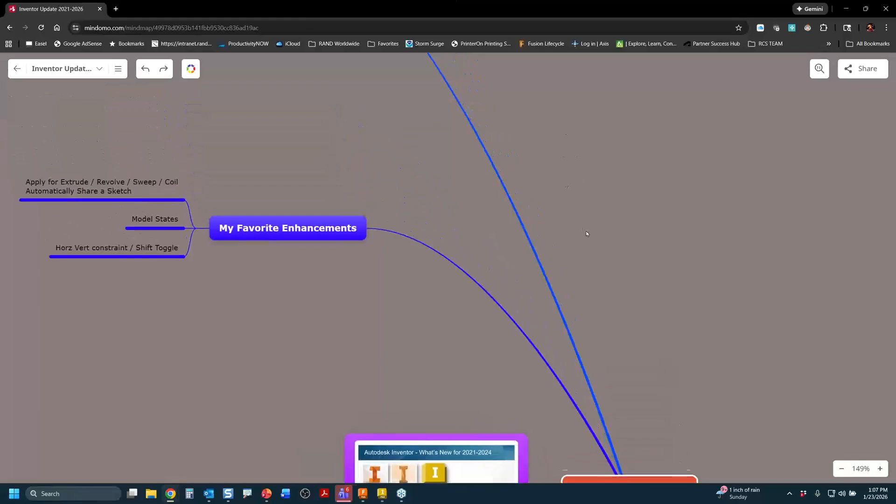I'm going to drag over this mind map, so bear with me, but this is how I keep my notes these days, talking about investing in new technology. When I started to look at this project, it was just 2021 to 2024. But then another customer came in and said they needed to go to 2025.

So what you're seeing is my collection of new features that I needed to share with new clients. And I had a rule: I wasn't going to share every single feature. Believe it or not, that's just way too much—there's no way I can share all the stuff that comes out each release. But I wanted to focus on the day-to-day use. If it impacts your day-to-day use, I want to cover it. If it's a change to a very basic command that everyone uses, I want to cover it. If it's a major change to a basic command, you've got to cover that.

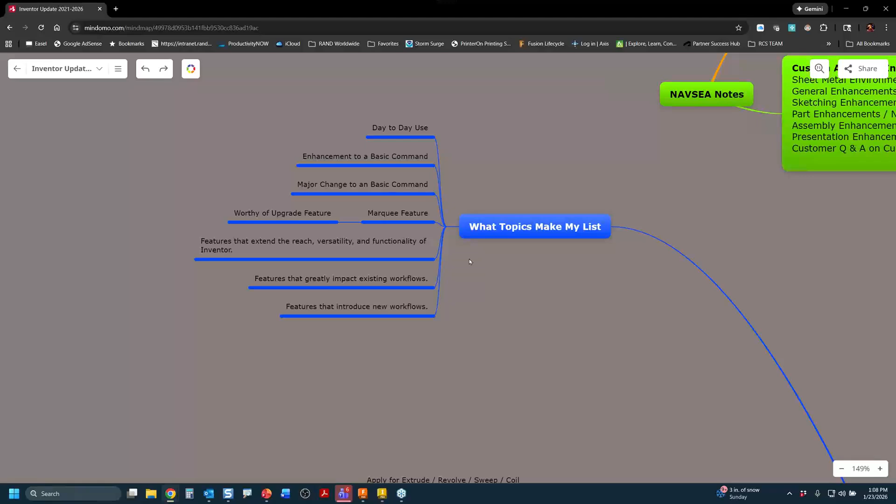But I call these, if it's worthy of upgrading, marquee features. I'm going to share with you what I think the marquee features are in just a minute. Each release has that marquee feature it's known for, but also features that extend the reach, versatility, and functionality of Inventor. I wanted to share those—features that greatly impact our existing workflows, which is really what we're here today to talk about, or features that introduce brand new workflows.

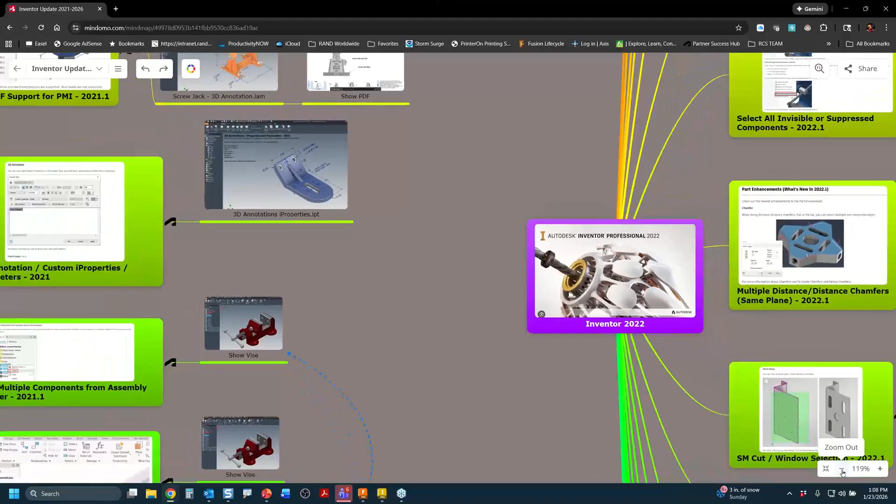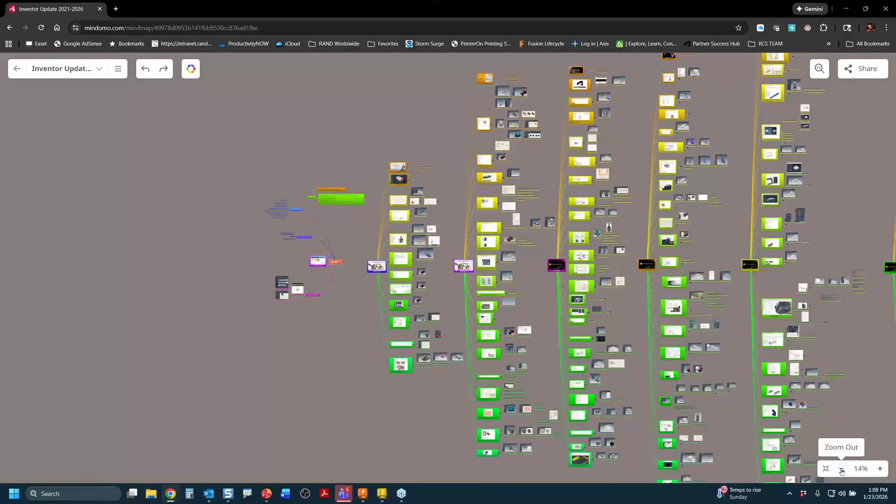So I mentioned I started with 2021 and went in and did that, and then I looked at 2022. I'll pan over here just a little bit more, and then I'm going to start backing out because it just got crazy. The more I looked, the more I saw really how much Autodesk is still investing in updating Inventor and making it viable for us to utilize. So I'm still working on 2026, and I know 2027 is coming out in a few months. So this is a very difficult thing.

But listen, your next update training class might not be to a specific version. If you're looking at update training, you might want to just look at, hey, show me what's new in the last few releases and let me get caught up with all of that.

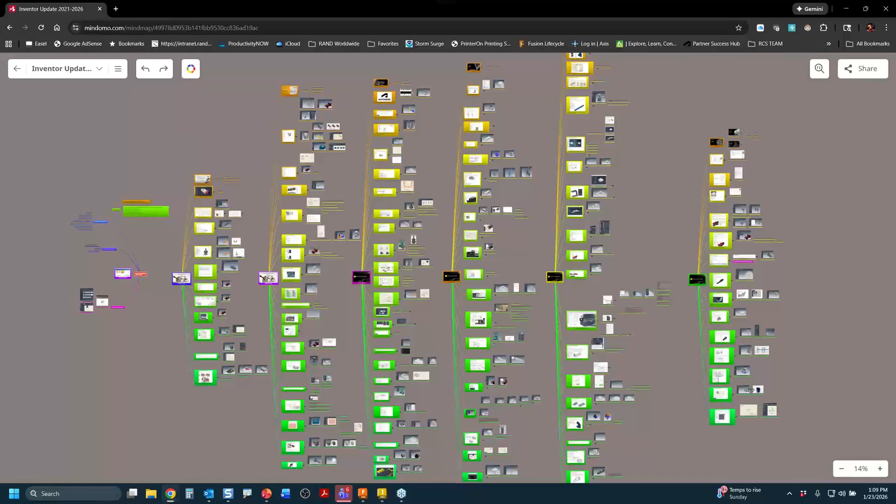All right, so I'm going to hop back in over here into PowerPoint, and I want to start talking about those marquee features—features that really do change the way we work. And we're going to start by looking at Inventor and how it does that.

So I think for the past several releases, the marquee features—most of you know them. Like in 2022, they introduced model states, and that really did change a lot. Model states are amazing. In 2022, there was also one of my most favorite features: the Apply command started to get introduced to a lot of the feature dialog boxes. I'll talk about that in a minute.

2023, that was the Mark tool and etching—etching became a feature that we could include in our parts. 2024 introduced Finish, so I could actually have a feature for powder coating my parts, painting them, or polishing them. That feature would actually show up in the hierarchy of the model.

2025 really did focus on sheet metal enhancements and redoing the sheet metal interface. 2023 to 2026—one of the major ones in 2025 and 2026 is the enhancements to the bill of material functionality. 2025 introduced a lot of pattern enhancements, and 2026, you'll see in a minute, brought zones and things like the open and save dialog box getting changed.

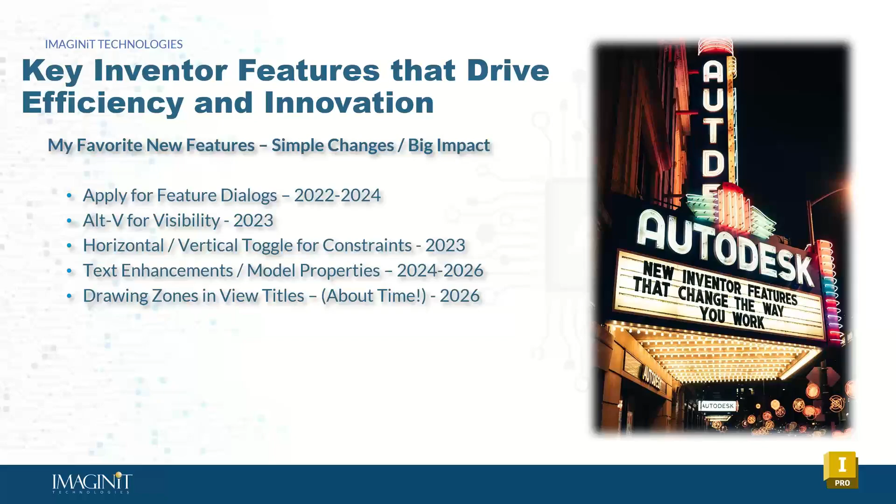So I want to share with you some of my more favorite ones. And if you didn't know these, again, maybe it's time to think about looking at some update training. So I'm going to hop over here to my Inventor application.

The first thing I'm going to show is a very simple one. It's a way to toggle the visibility off of certain objects. This is one of the exercises I developed for my update training class, so it's got some instructions here on the screen, don't worry about that.

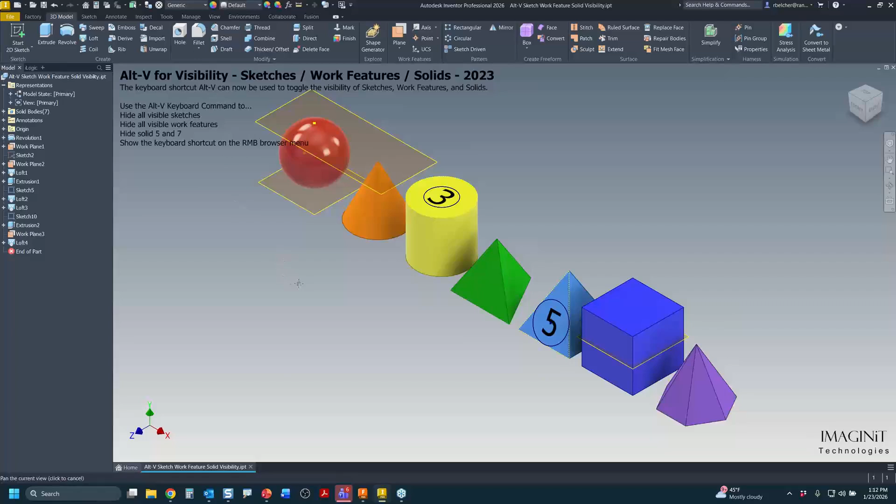Have you ever opened up a file and had sketches visible? Someone had left a sketch visible or a work feature visible? Or maybe you just wanted to turn the visibility off of a certain body. Normally you'd go over here to the browser, and I love this about Autodesk. Here's a sketch that's visible, and usually we used to right click on this and select visibility.

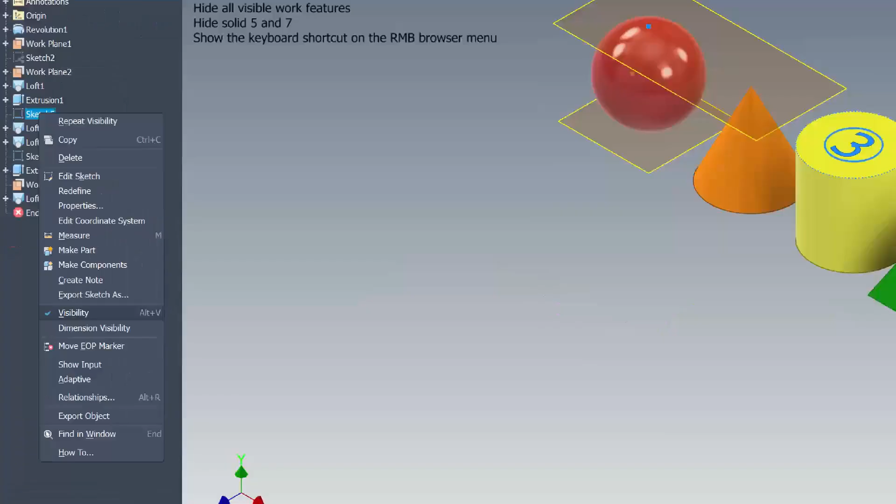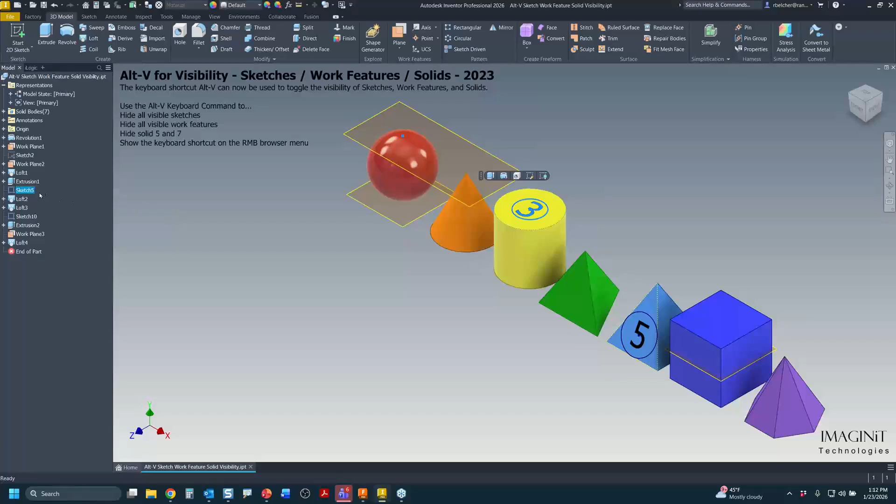If I zoom in here for a minute, for ages they've been telling us that the hotkey for visibility is Alt-V. But honestly, you had to be in this menu to actually use the Alt-V hotkey. I can't remember, but I think in 2023 they fixed that. So now I can simply select the sketch and click Alt-V, and it disappears.

I love that, that saves me 2 or 3 clicks right there. So there's sketch 5, I can get rid of that. It works for work planes too, so I can click those, do a little keyboard shortcut, get rid of those work planes. And it also works for selected bodies. If I go through and start selecting my bodies, I can quickly turn those off and on very easily with that little keyboard shortcut.

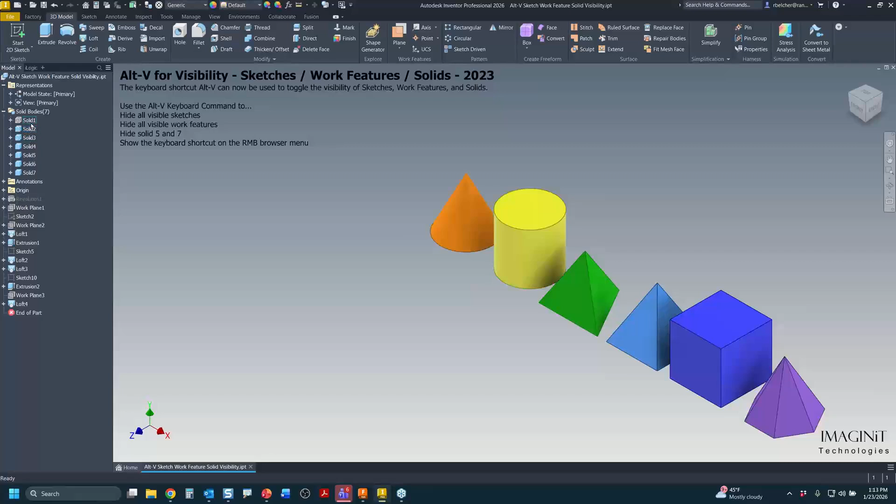So, Alt-V. Between you and me and friends here, it's not the most comfortable keyboard shortcut, but it's a good one to know. Think about me being an AutoCAD or Inventor old fart guy - I'm fighting muscle memory on that because I'm so used to right-clicking and doing it. But incorporating that little Alt-V trick could save me steps every time I think about the visibility of objects.

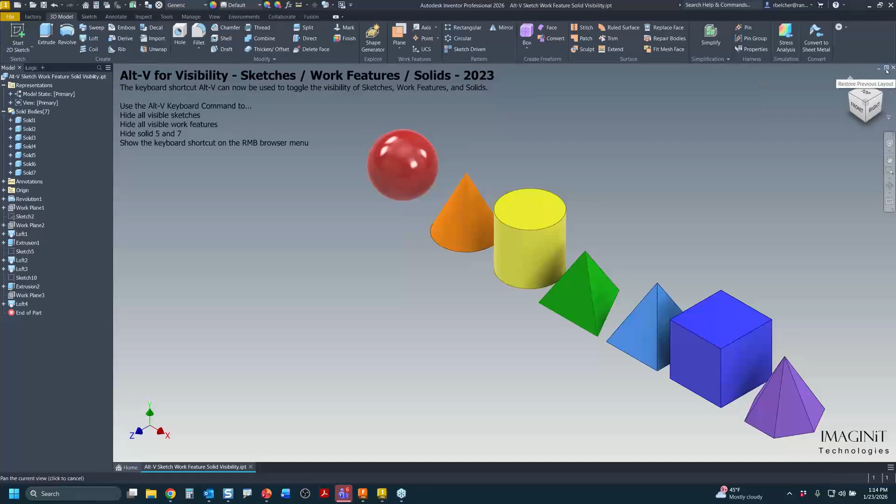All right, we're going to get out of this file. Let me get into another one here. I wanted to talk about another feature that I dearly love, and that's the fact that they've added 'apply to many' to many of the feature dialogues in Inventor, like extrude, revolve, sweep, and coil, and I think it's in loft as well. But here I want to focus on the fact that a simple change can drastically affect the way I work.

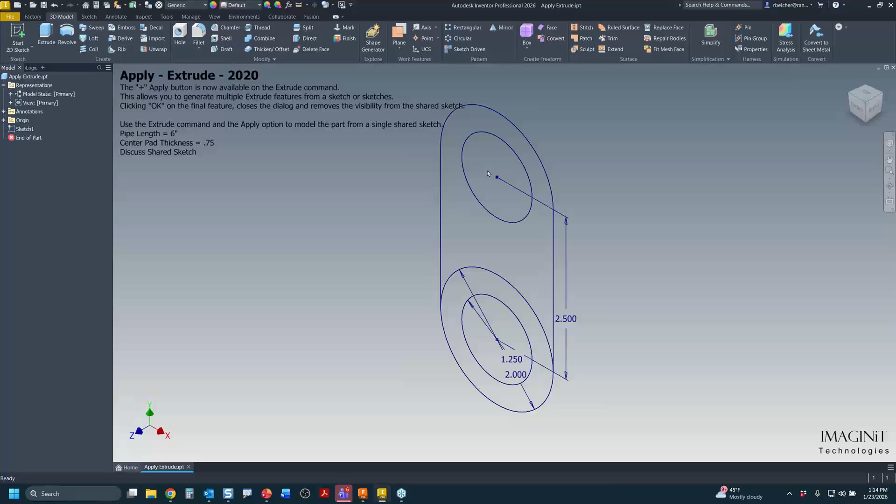So this is a simple little sketch here, and I want to do some extrusions real quick, and I want to show you the classic way first. If I start my extrude command, I would draw a sketch - I've got that already done - and I'd set up the extrusion. I want to extrude this to be 6 inches, so we'll drag down here to 6 inches.

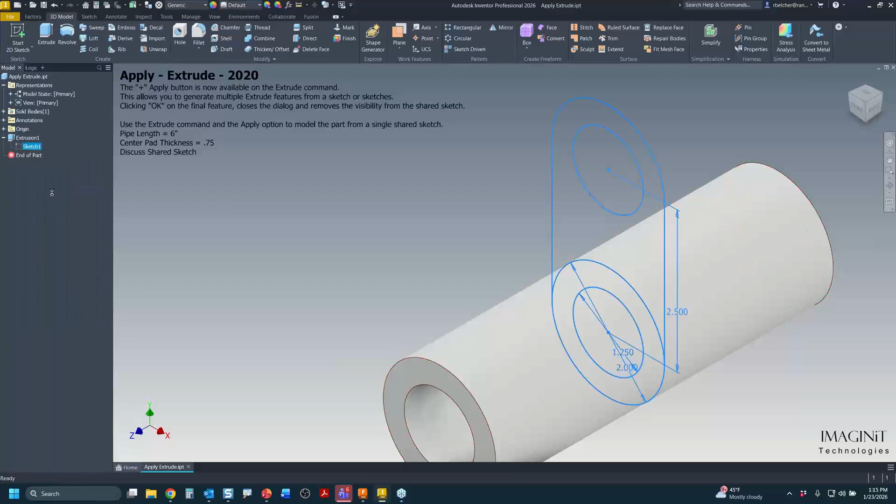And normally, if you would do a shared sketch methodology here - classically I'm used to this - I'd click OK, then go to the browser, find the sketch, right-click and share the sketch. Then you'd have to start the extrude command again and go through and create that feature, click OK, then go over to the browser and turn the visibility off of the shared sketch. Many of us have been working that way for 26 years at this point, so there's a bit of muscle memory and reflex here.

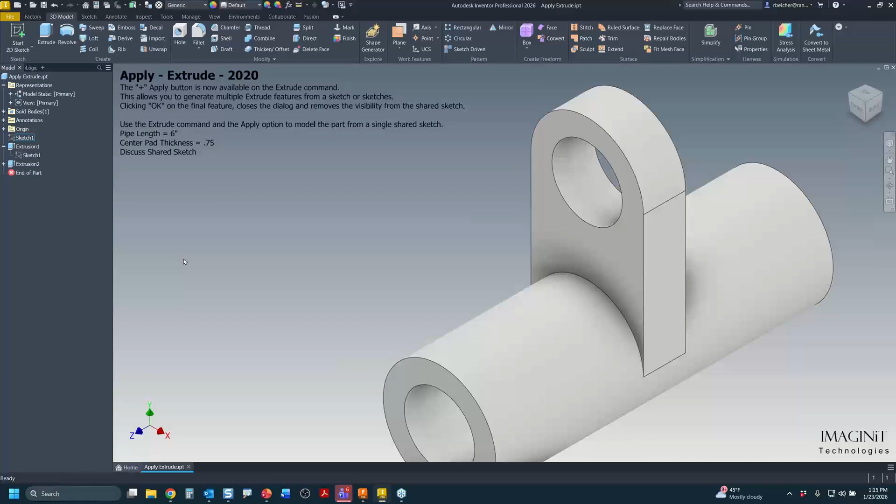But now let me undo real quick, let me get back to where I was when I started here. Let's do it the modern way - and I love this, it's such a simple change. You click extrude, we select our first profile, and we'll drag it out to the 6 inches.

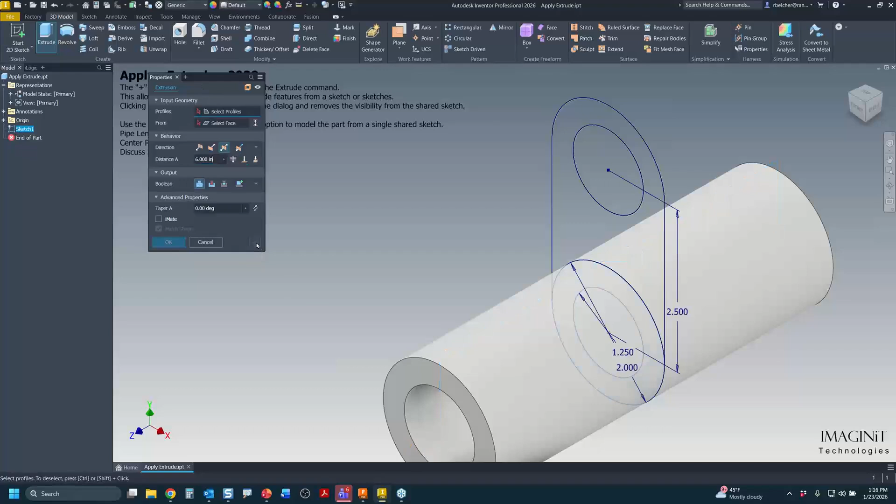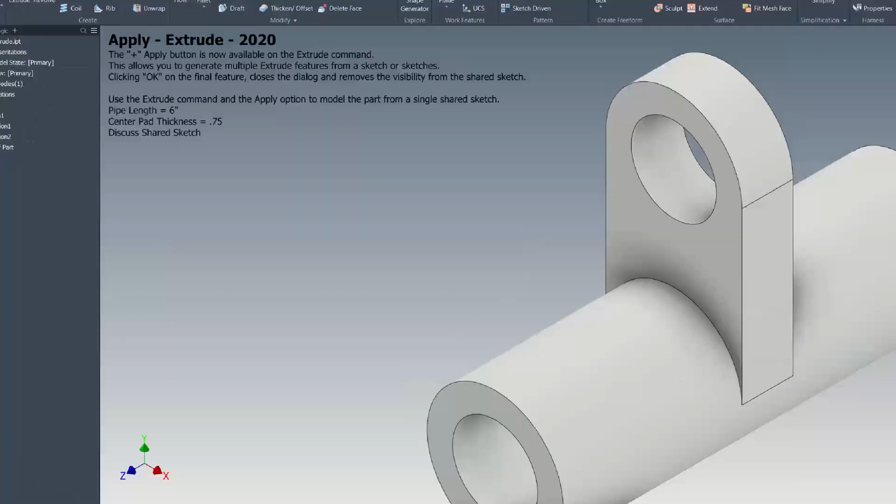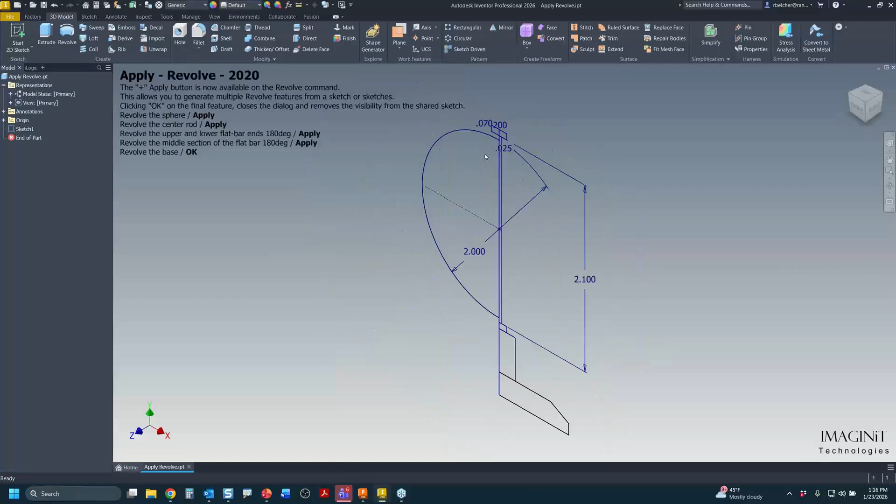And we want to click apply. It's such a simple thing, but the dialog stays open. Then I can select a second profile, drag that back in, and I click OK. Now watch, I love this too. The sketch turns off, and I end up in the browser with the same shared sketch methodology that I would have ended up with before. I love that. The sketch is still shared. So it just changes the way I model. It's a fundamental change, and I hope you have discovered this already.

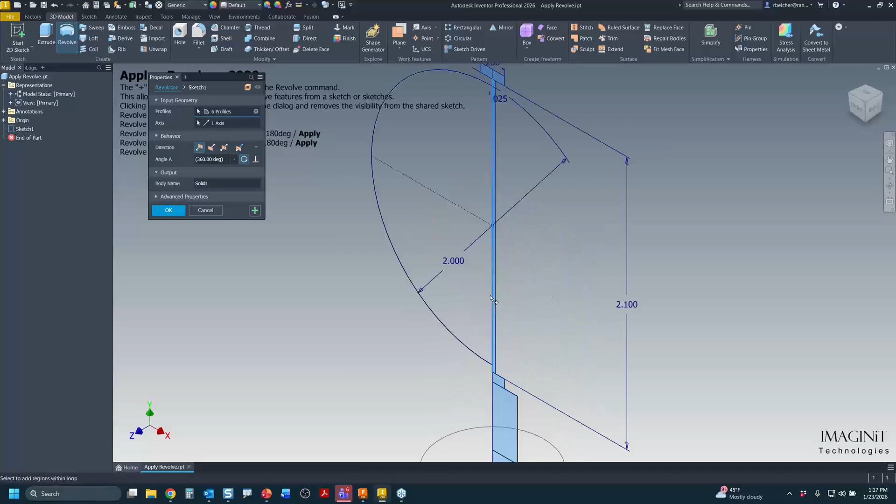If not, this is something I really think most of us should be working into our daily lives. Here's revolve. Just to make the point that this apply button is on almost all the features now, I'm going to run a revolve on this. So we'll click revolve. Click OK. Cancel that. What did I do wrong there? Oh, I know why, sorry. Revolve. We'll select our profiles. I got the wrong profile at the top there.

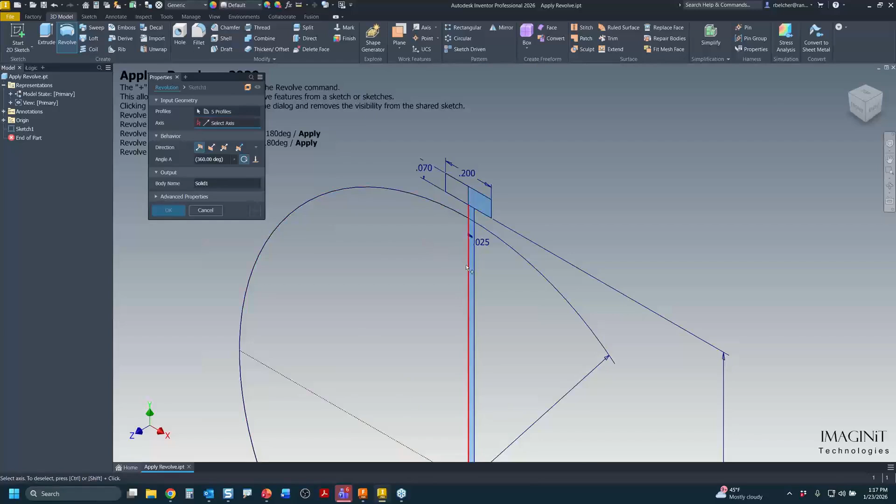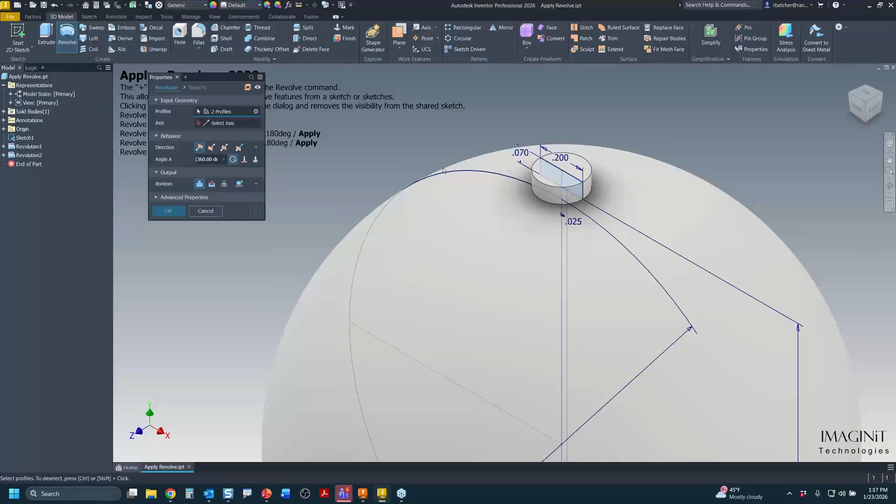I want to just get that one. All right, so my first revolve, I'll click apply. My second revolve, I'll set up the axis for that, make sure I'm on the right spot there. You click apply, sketch is still visible. I do my last revolve. This time I'll select that axis right there, and we'll just make it 180. How about that? We'll click OK, and there we go. And I end up again with a shared sketch, but it feels like I never had to leave the dialog box. It was just one feature after another, and we're ready to go.

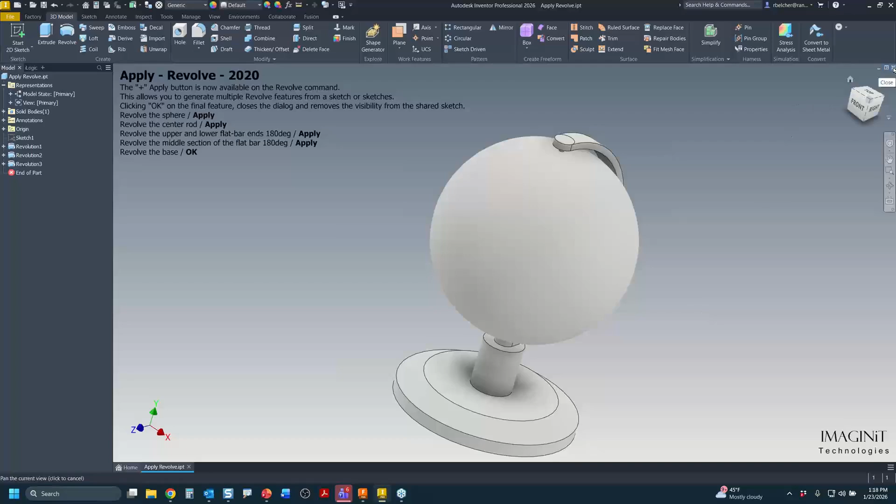So that's one that I hope all of you start to look for. Look for that little green plus sign and the apply option. It's very dominant at this point, almost in every model feature. Look for the apply option and force yourself to start using those things.

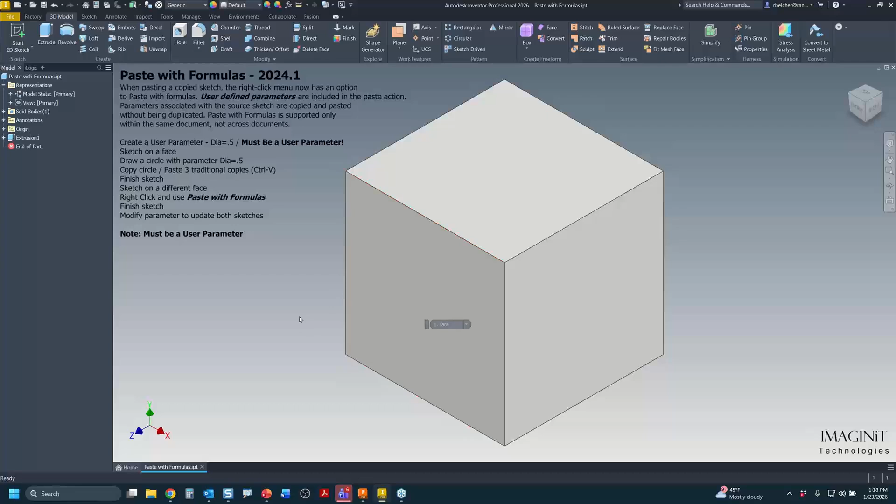Got another one. Again, I tried to keep these as simple as I could here, but I didn't want to open up a 500 part assembly, pick one part, and then do something simple. So I want you to focus on the simplicity of these things, not necessarily the way I'm presenting them. But here we go, I'm going to sketch on the side face of this part, and I want to talk about something as simple as copy paste.

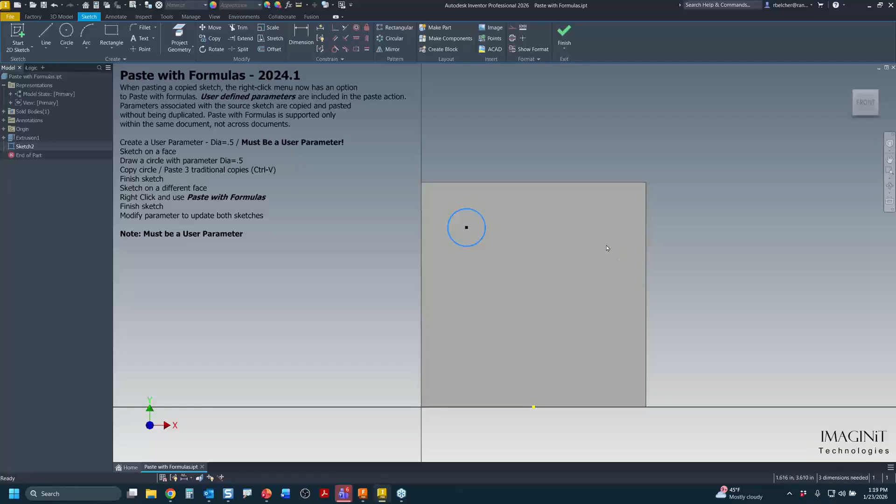All right, this one bothered me for a long time, and I think many of you know where I'm going with this. But if I draw a circle, I want to draw here, I'm just going to copy paste it. So I'm going to select it. Good old Control C. How many of you love the idea that when you Control V, it pastes at the cursor? I love that, and finally that works. That's not necessarily what I'm here to talk about. But I remember when that came out, and I knew I could start using copy paste like a normal person inside of Inventor. But I want to talk about constraints.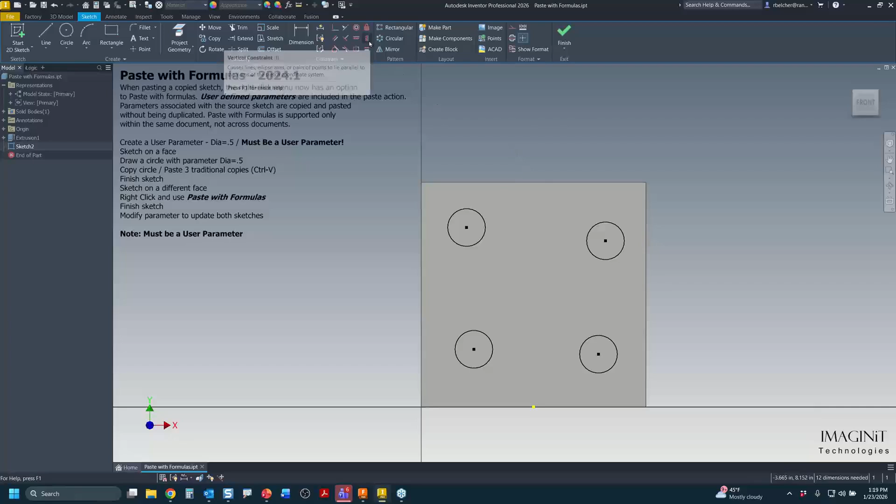All right, a little bit about constraints. So the goal here is to get a rectangular grid of these circles. I think many of us are used to going up. I'm going to do my vertical constraint first. So you get the vertical constraint, and I'll click this one and this one. I'll do the vertical constraint. I'll get these two circles set up. That looks good. Now I want the horizontal constraint.

Well, now I'd have to go up. Classically, I'd go up and click the horizontal constraint tool and keep going. But in modern Inventor, you hold the Shift button down now. And it's hard to see on the screen, but if I hold the Shift button, I'm in horizontal. So I could just go ahead and do the horizontal constraint. And again, that one is such a good feature to have in your back pocket. It really is.

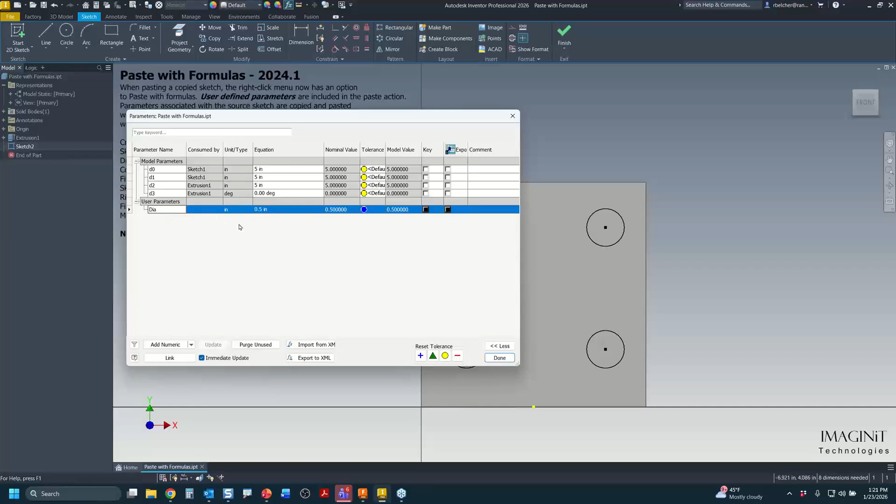While I'm here, this exercise is about pasting with formulas. And it's not necessarily one of my favorites, but I'm here, might as well talk about it. So pasting with formulas: if I go up here, you have to create a user parameter for this to work. So I'm going to create a user parameter called diameter. I'm just going to go DIA, and I'm going to set this to 1/2 inch, so 0.5. All right, got a user parameter there. I'm going to select done.

I'm going to select this circle. I'm going to add a dimension, so we'll just add a dimension there, and we're going to type in DIA. I think many of you guys have done that. And of course, that first dimension scales the sketch. That's why all of those circles updated at the same time, all right? It wasn't because they were parametrically aligned with each other.

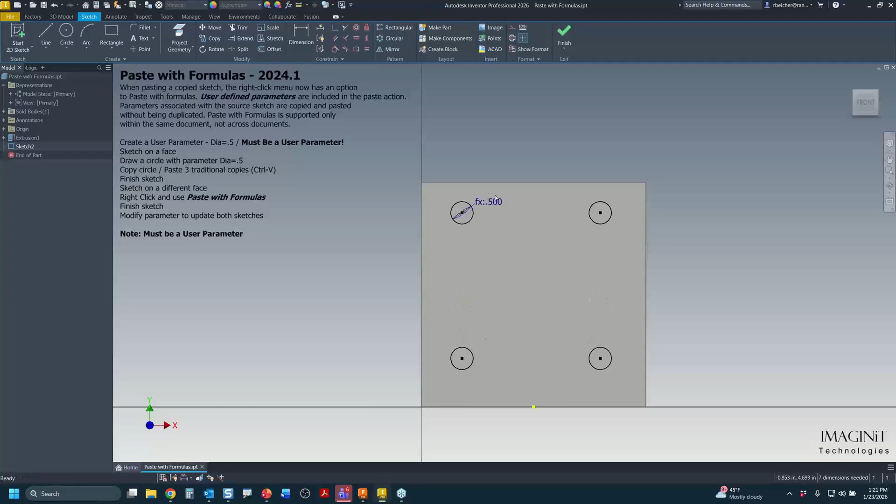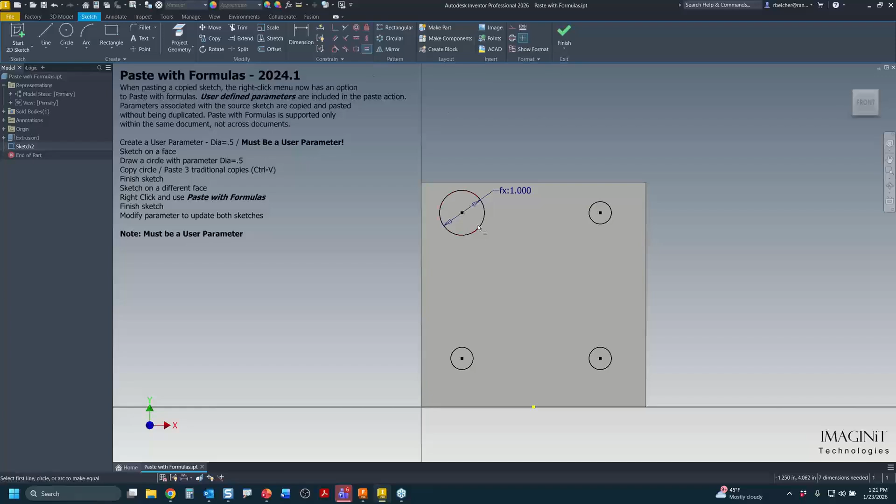You know, for instance, if I were to go change that parameter to 1, only one circle is going to change, right? Now, you guys know how to fix that, right? You could go in and add an equal constraint. Probably the easiest way to do that would be to do that.

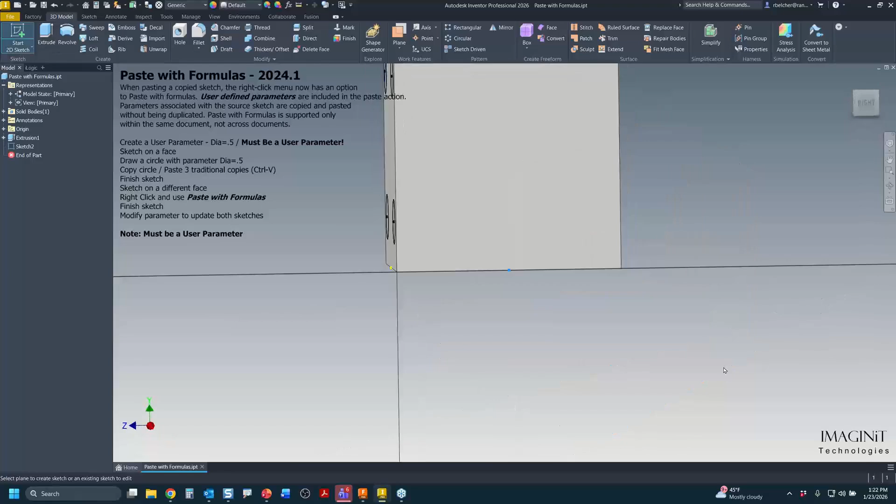So very straightforward, very basic stuff, right? But what is pasting with formulas? I'm going to copy, hit Control C. Now watch this. I'm going to finish my sketch and start a new sketch.

And I'm just going to paste, but this time I'll paste with formulas. So what's the difference? If I go back to the parameter table and change that back to 0.5, you'll notice both circles update. Even the pasted one updated. And I think that's amazing.

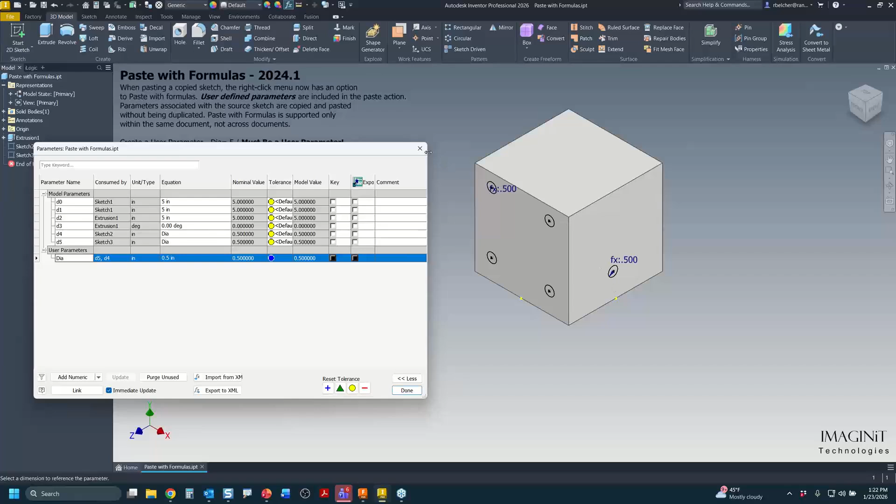I didn't have to go through and reset the parameter on a separate sketch. I actually looked earlier today, like, are you sure about this? And I was in the sketch, so I'm in this sketch. Let me orbit a little bit. I'm like, I really can't do an equal constraint from another sketch to this sketch. You can't do that. So this gives me a way to share that parameter simply through a copy paste. And I thought that was pretty good.

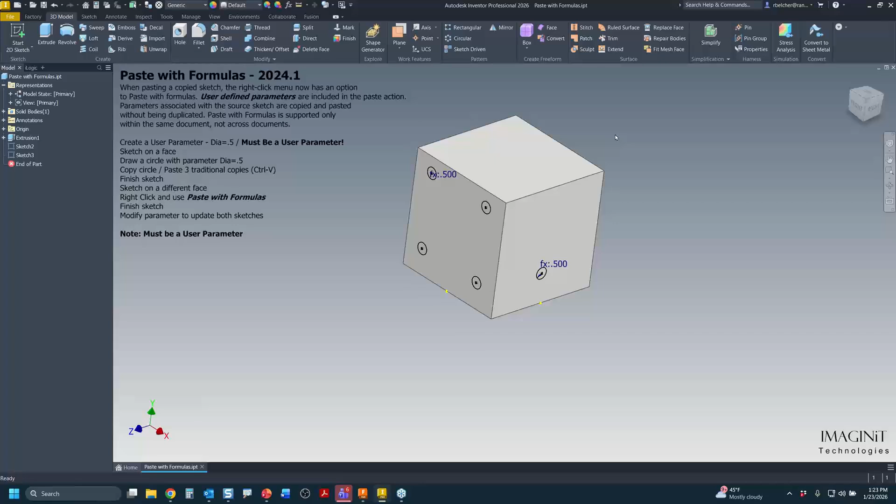The main point, though, the one that I love, is the horizontal vertical constraint toggle. Where has that been my whole life? That's a common thread in a lot of these features I'm going to share with you. So let me close this out. I've got another general favorite feature.

This is one I really can't point to a release for as to when they started. I think around 2023 to now, they've been overhauling the text editor in Inventor, specifically making it more accessible to things like your part parameters, your feature properties, model state names. If you can make it in Inventor, there's a good chance the text editor can go in and get the data and display it on your part, so that if you make a change to the model, your text on your part or drawing updates automatically. This is a big deal, how integral text has become to the 3D and 2D environments.

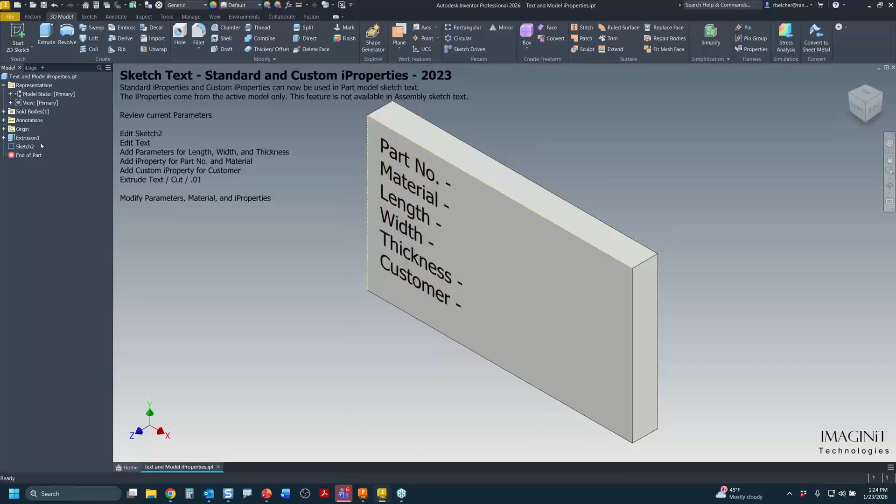In this example, I've got a part here with a sketch on it. I'm going to go into the sketch, and I've got part number, material, length, width, thickness, customer. These are either parameters I'm tracking or iProperties in the part that I want to parametrically control. So if I double click the text, I get the text editor, and this is where I think all the magic is happening, right here in the type panel.

This gives me access to my model parameters, things like finish parameters, user parameters, iProperties, custom iProperties. All of this is now available to me. So for instance, part number, well that's just a standard iProperty, we all know that one. So I can come down and grab my part number and get that into the text editor. You want to call that an attribute or a field—if you're an AutoCAD guy, I've been teaching AutoCAD for the past week, so you know, very similar functionality.

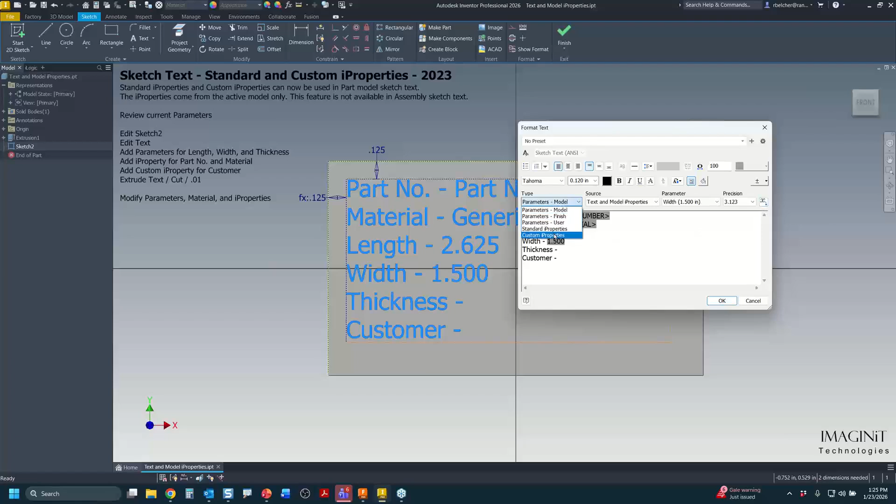Material, that's another iProperty, you can grab that and add that. You can see it actually happening out here as I do. Length is a parameter, so I can go in and get my parameters from the model and grab length. I could have also grabbed that from the custom iProperty area, but there's width. Let's get that in there. What's the last one? Thickness. Thickness is in here, I'll add that. The customer, that's a custom iProperty I'm tracking, so I've got my custom iProperties, there's customer, I can add that down there. So if I click OK, now I've got parametric text.

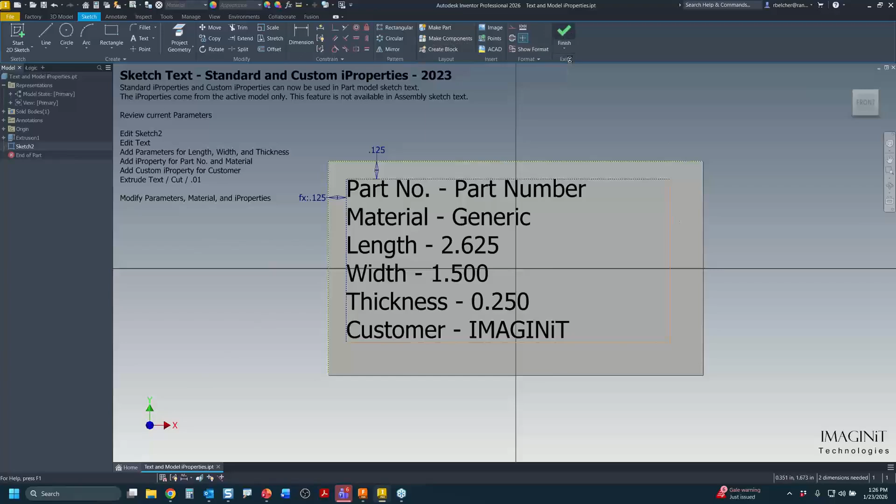So let's finish this, let's use it for something. How about marking it, etching? I mentioned etching, that was a marquee feature, I think, for 2024. So now I have etching, I can go in and etch this right onto the part, and that's parametric etching. If the part changes, the etching will update.

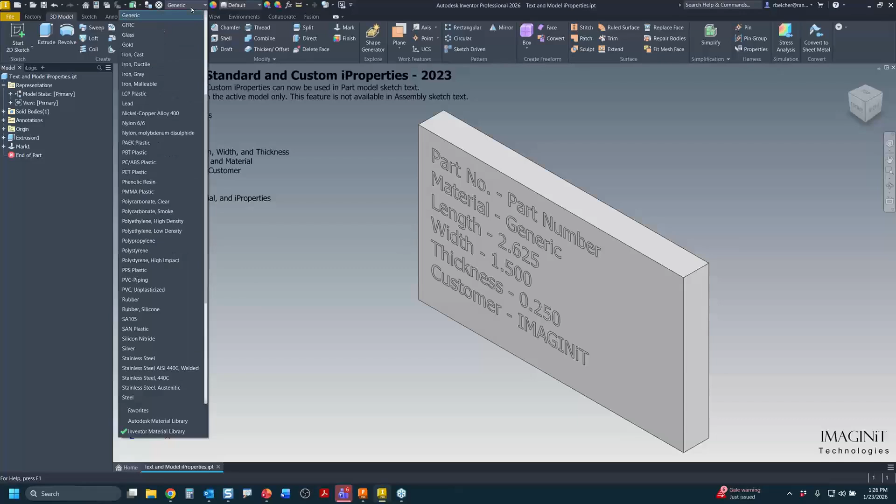That's amazing. But let's make a change. Let's change the material type. Let's come in and grab some, we'll just make it steel carbon. And you'll notice the material, after it cycles through, now says steel carbon. Or let's go in and make a parametric change to length.

Let's make it 3.25. I'll hit enter - takes a second. Etching doesn't update very fast, but there you go. Now I got 3.25 for my length of the part.

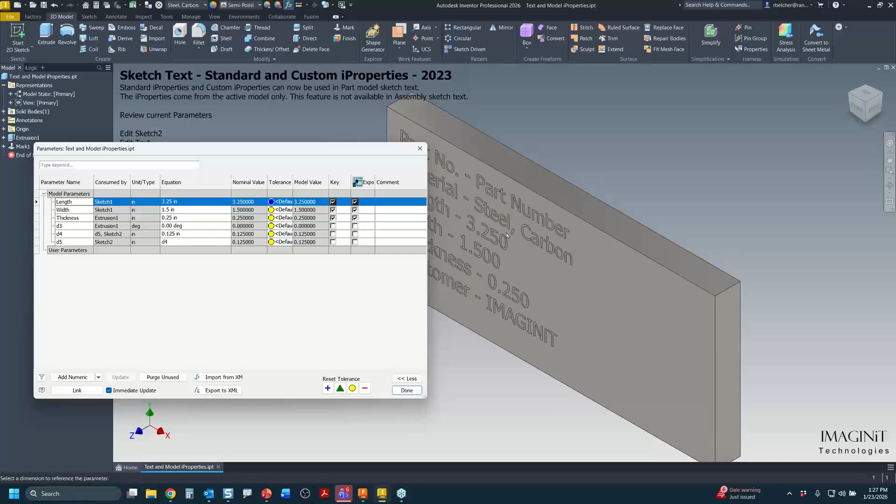Having the parametric text really helps if you're on a sheet metal setup and you're etching the customer information, the purchase order, part numbers onto the sheet metal part. Well, first off, you can do that now, and it's all parametric. Makes your life a lot easier. New opportunities start to come out when you take this and apply it to your manufacturing processes.

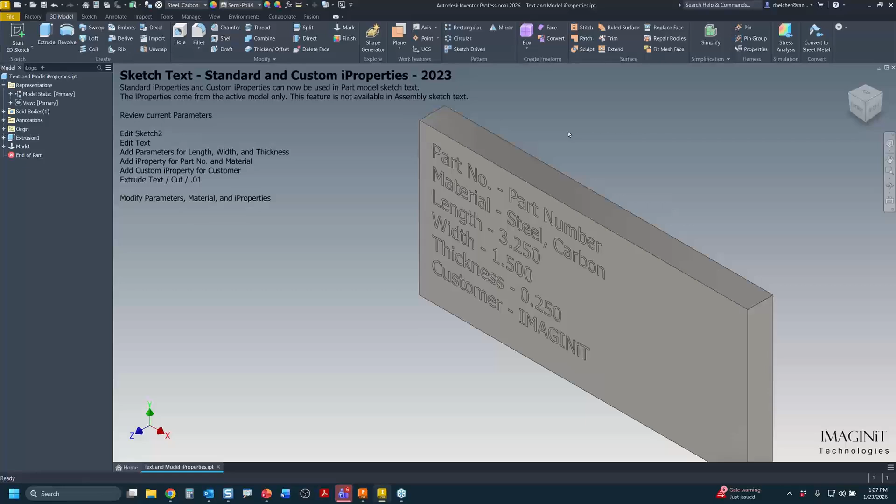All right, I got one more, and this is a 2026 one, and this one probably wins the award for me anyway. About dang time we got this.

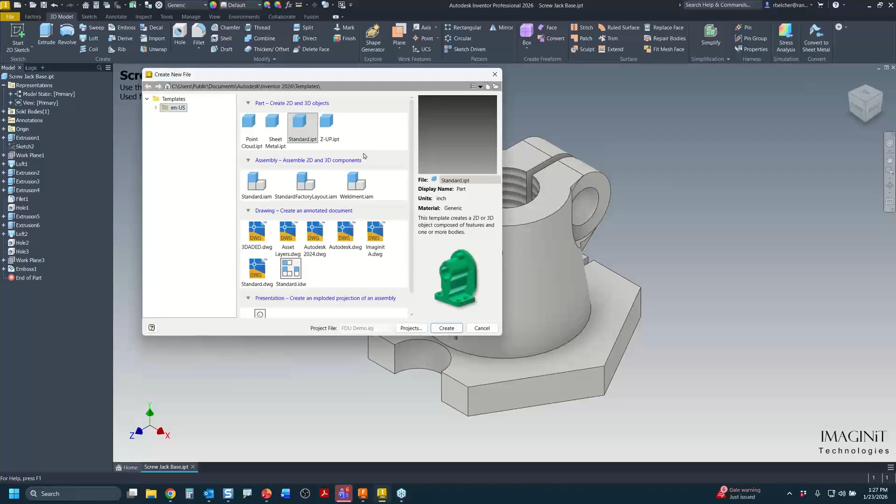So I'm going to open up a part and do a simple drawing. For this example, I want you to notice I am using 2026, and the standard out-of-the-box 2026 drawing template. So if you're using your old drawing templates, if you've been migrating them forward, or maybe you haven't been migrating them, this might make you rethink.

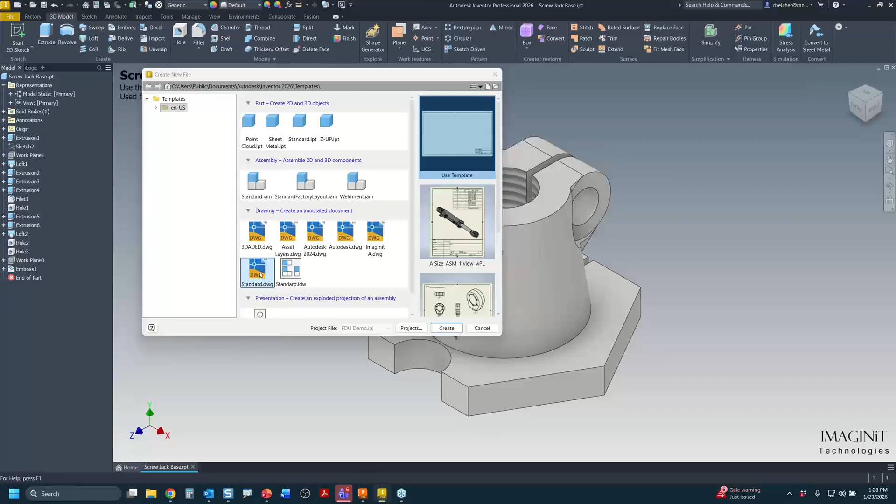You might need to go in and change a few things with your template. So here's my drawing. All right, if I ask everybody out there, how many of you are actually using zone borders?

Some of you might say, oh, we used to, but Inventor never really worked with zones very well, and we went to just a rectangular border ages ago. Well, yeah, for 26 years, I've wished when you make a view in Inventor, you can include the zone in the view. Now you can.

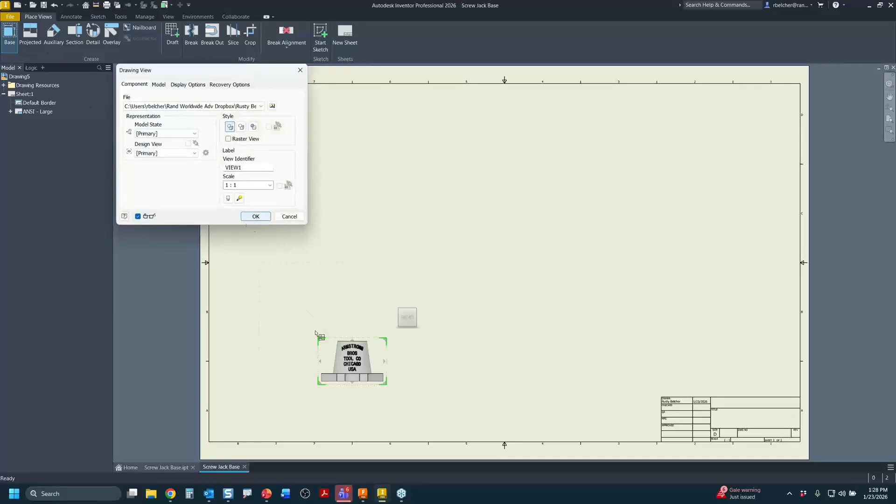So I'm going to do a base view. It's a simple part - the part doesn't really matter here, but the view does. So this is my base part for the screw jack. And I want to turn on my view identifier, and go back into the text editor.

So we've got access to the text editor now - that's a relatively new feature. But the thing that 2026 introduces, right beside the view identifier, I'm going to put a dash and a space. Then I go over here on the text property dropdown, and I've got view label properties.

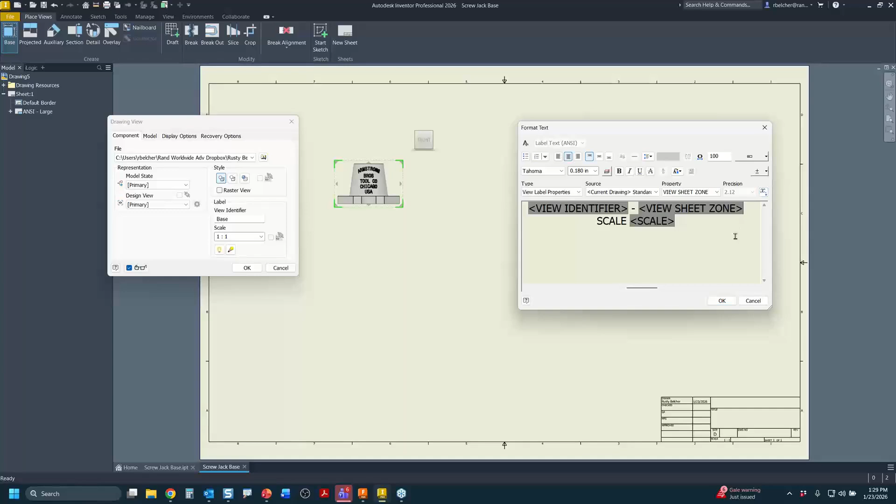You can explore these - there are plenty of them here for the parent sheet information and the view information. And I'm simply going to pick the view sheet zone. Love that. I'm going to add it, click OK, and click OK again.

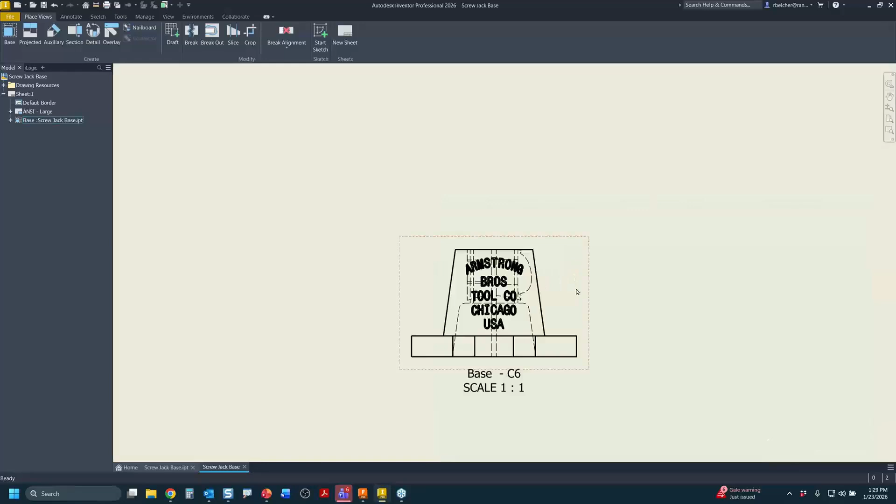Now, of course, you could do that in your template so that it's automatic if you want your zones to appear. And I know I'm not really standard here in the way I'm doing this, but see, this is base view C6. So if I look, I'm under C, or near 6, and you got to try it, right? You just have to.

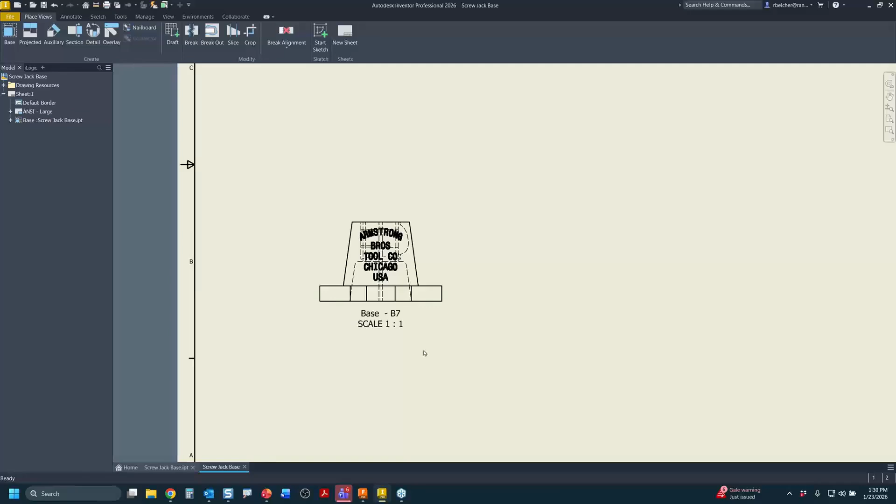You got to move it around. So I'll move it up here, and it's D8, or I move it down here, and it's B7. I think it's about time we've got zones, interactive zones with our views, and it's not just the base view.

What if I do a section view or a detail view? I'm going to show you a section view - detail views would basically do the same thing. But if I were to come down and drop in a section view, and drop this off, instead of it just being the classic AA - it still is AA, right? But now I've got, hey, for this view, you need to go to B7. It's actually telling me where to find the parent, what zone to look for the parent.

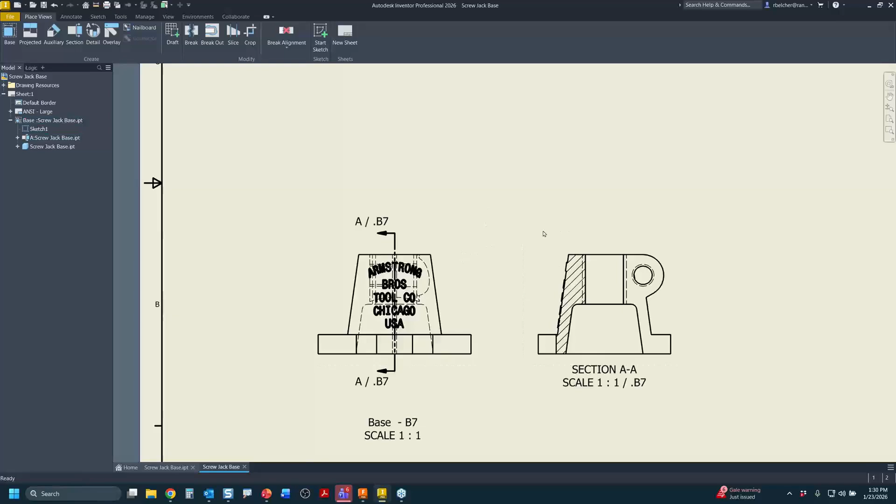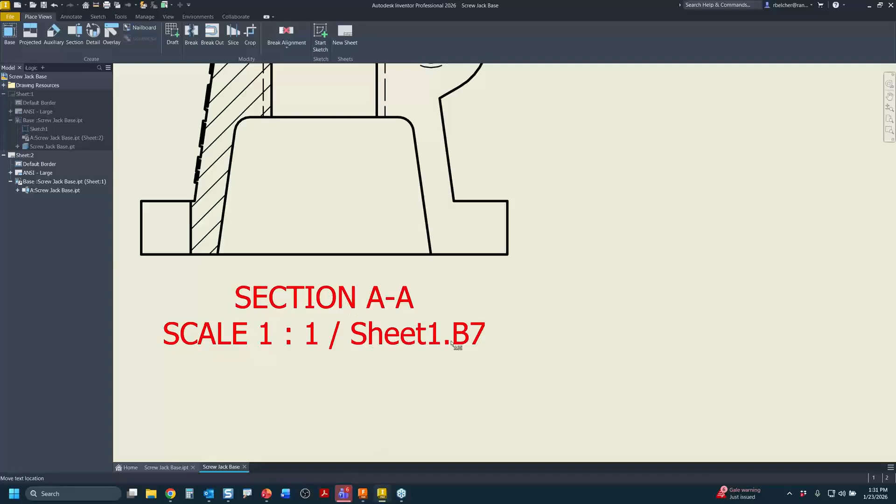And you can try to break it - I've tried to break it. Hey, let's see what happens if I make a new sheet. And what we'll do is move the section view to sheet 2. What happens here? Well, okay, so it says, hey, for the parent, you need to go to sheet 1, B7. It's amazing.

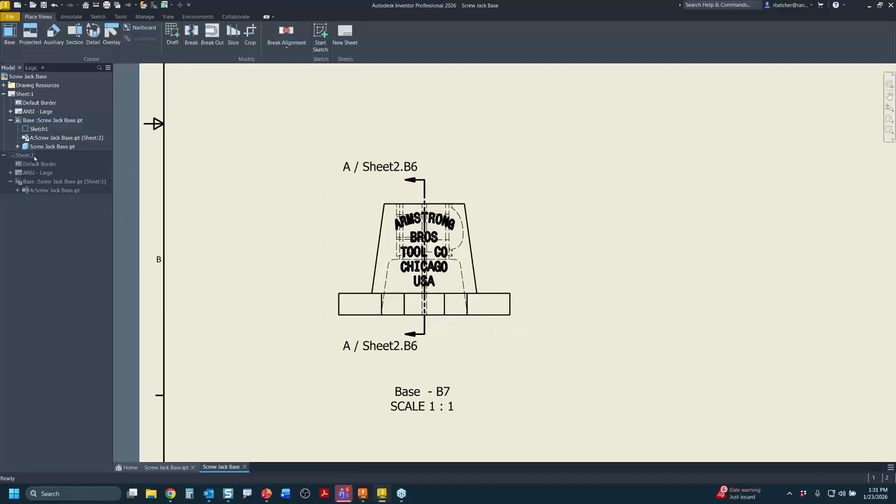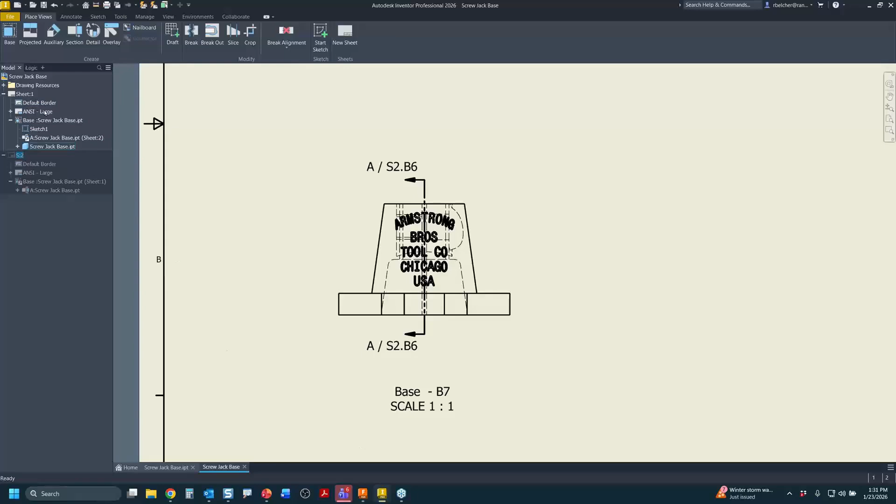So now it should say S2. And if I go back over here—sorry, I did that twice, didn't mean to. If I go back to sheet 2, and I right click on sheet 1 and edit the sheet, I'll just change that to an S as well.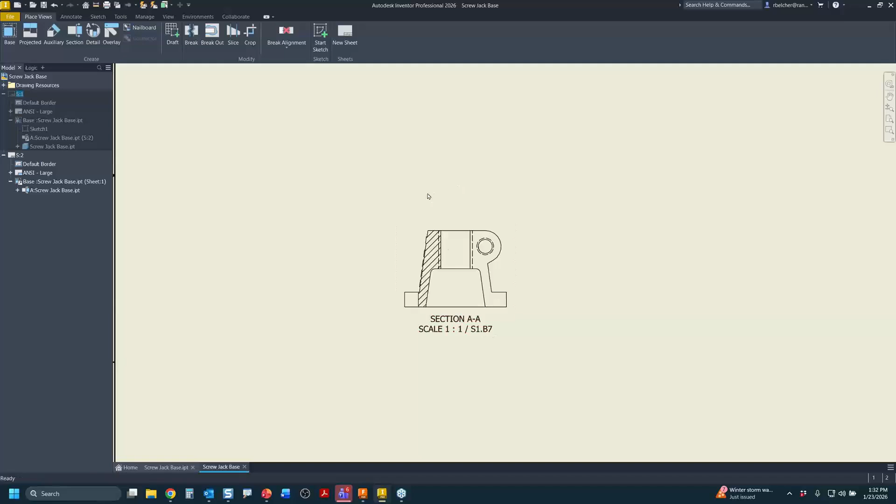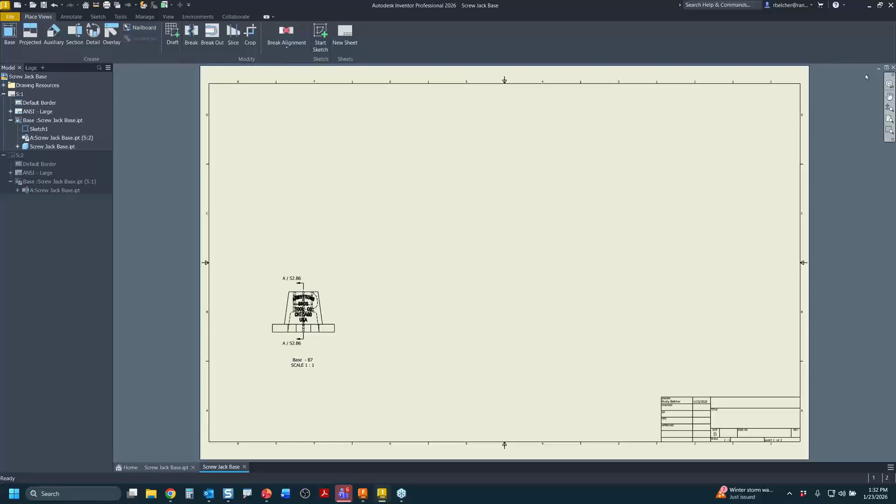Again, you could go in and do your templates now in way of zones so that it displays exactly how many of us old timers were taught to drop our views on a zone border. One of my favorite new features, period, is the zone tools, finally working the way I thought it should have been working for years. I hope you get a chance to explore that. Be careful about updating your old templates—don't go crazy, but start investigating this and see if it fits into your current workflows and really changes the way you're doing your work or your job.

All right, I'm going to jump out of Inventor for a minute. I want to get back over to the PowerPoint. Let's see, there we are.

Fusion is certainly a part of, it's one of our tools now. If you've got the product design manufacturing collection, you've got Fusion. I really do hope you're paying attention to it. There's no doubt that's where a lot of the new AI stuff is coming in, and a lot of the groundbreaking changes or innovations are being introduced or debuted in that tool. Modern Inventor users, I've got one foot in Inventor and another foot in Fusion. You have to keep up with what that tool is doing. Many people run their CNC through Fusion—they model in Inventor, but the CNC and all of that is a Fusion process.

But we really want to focus on it for a few minutes. I did a webinar probably about 7 or 8 months ago about the AI tools currently in Fusion. That whole webinar focused on these 5 main tools: generative design, automated modeling, automated toolpaths, automated drawings, and the latest one, the Sketch Auto Constraint tool. If you're interested, I'd encourage you to go find our old webinars and look at that one if you really want to take a deeper dive into what AI can do inside Fusion.

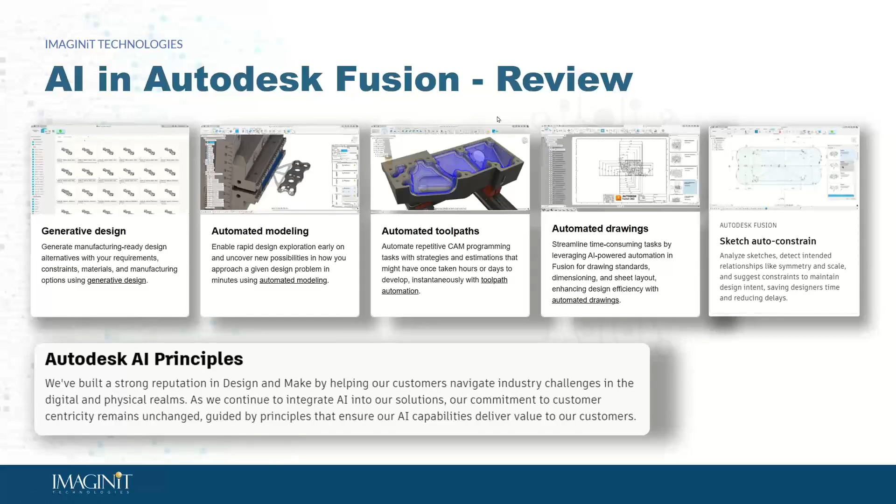My focus today, though, is a Fusion-based example, one that I recently ran through, and I wanted to share that with you. I mentioned CNC toolpaths, automated dimensions, and generative part design—those are all amazing tools, amazing things that are possible with AI. But I ran into one not long ago that really floored me, and it really did change the way I think about what's possible and how much time I really need to be spending on a certain project.

Every year I generate a Christmas card, usually in Inventor—it's a 3D Christmas card, and I send it out to the people I work with at IMAGINiT. This year I didn't have a lot of time; I had a bunch of big projects in December and was on the road a lot. So what I decided is I have a factory design utility model I use a lot. I figured I would just string lights up, put a Christmas tree up, and there'd be a cherry picker with the guys hanging the star. I just made a little scene.

In the midst of this, I didn't have a sign on my factory, and I just wanted to personalize it. I wanted it to say Belcher and Sons. And I got to thinking, that's going to take me a while to draw that. And then I got to thinking, do I really have the time to do that?

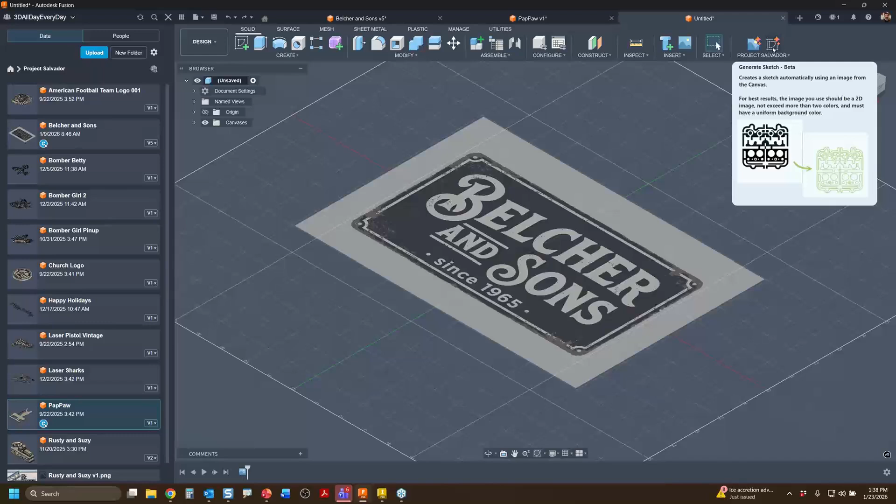Watch this. I click this tool, I'm going to select the image, and it takes off. I don't know what you consider AI, artificial intelligence, but I also consider things like automated interactions AI. So it takes a minute or so. All right, done, I click OK.

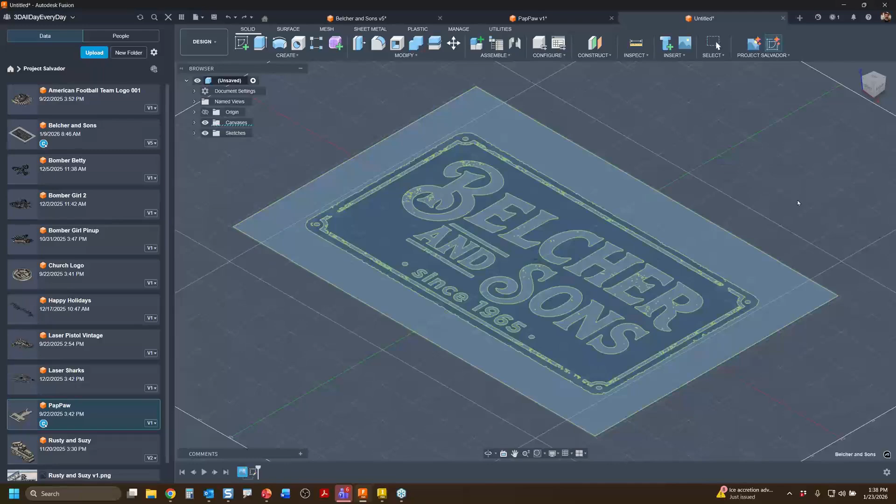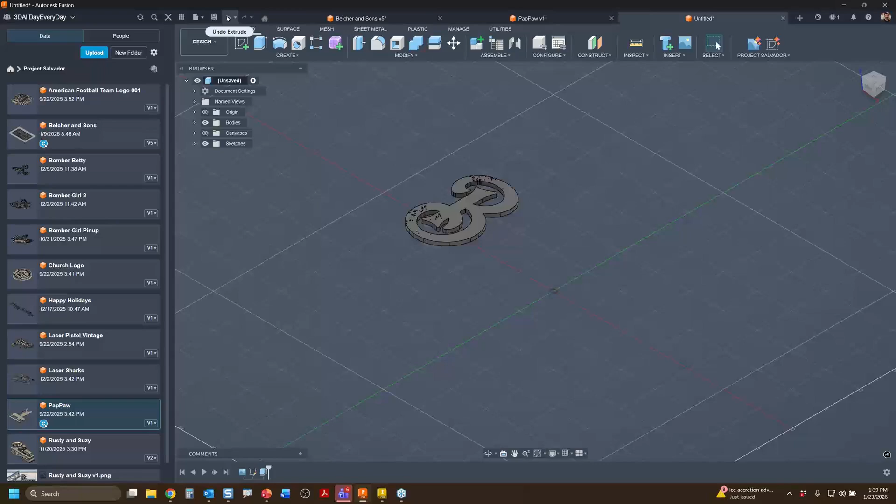Here, if I go in, I'm going to turn off the canvas for a minute. There's my sketch, and it's all closed. If I select extrude, I can extrude that letter B right there, and it's got all the little imperfections in it, just the way I wanted it. So I was able, if I undo, to just do several extrusions, and here, I generated this 3D sign in literally less than 2 or 3 minutes. This is far more than what I would have ever hoped would have been possible for this little project.

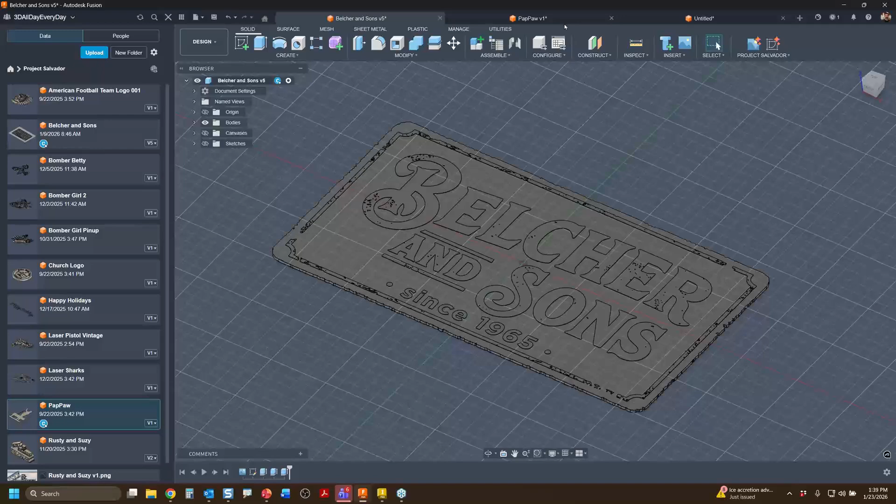And then I get to sample in all kinds of stuff. My grandfather, he passed away a long time ago, but I still think of him all the time. One of the last times he was with us, he went out—I live in Hampton, Virginia, there's a fort called Fort Monroe—he was out there fishing, and a guy from our newspaper took this picture of him. I have had this picture framed in my office for years. Anyway, I figured, hey, I'm going to throw that old photograph—it's actually a photograph of a newspaper clipping, I don't have the real photograph—into this thing and trace it.

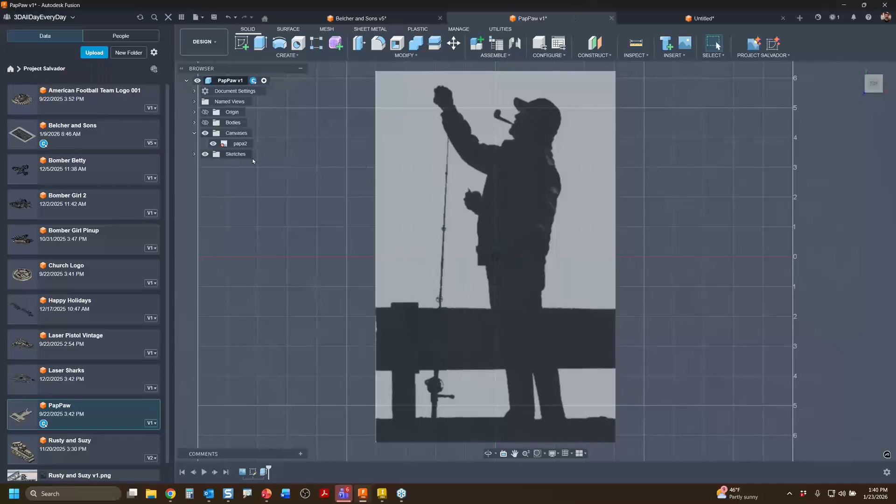And it turned out amazing. If I turn the canvas off, again, it did a fantastic job of tracing imagery. Now I've got that in my toolbox, I can use that anytime I want. It makes my life so much easier. I've got customers who have complained year after year that Autodesk didn't have an easy way to trace images.

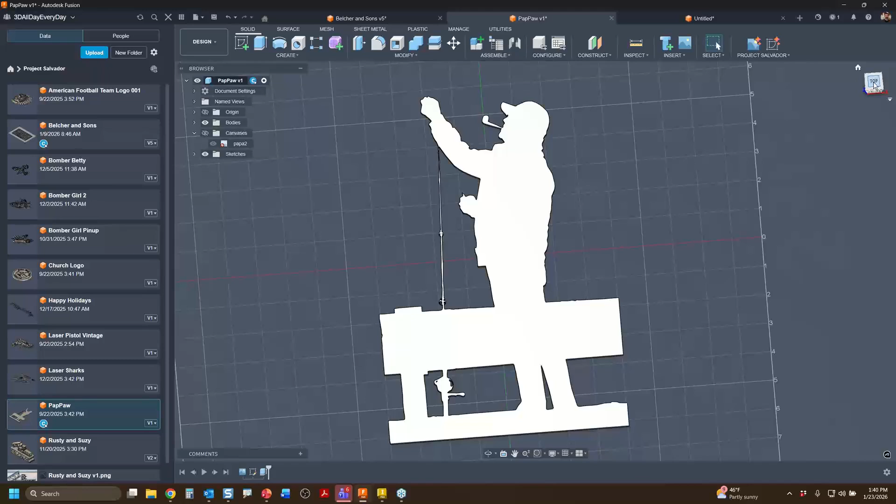Now, this is in beta—Project Salvador is a beta tool at the moment. So I don't know what its future impact will be, or how it's going to hopefully integrate into the tool eventually, but definitely it impressed me, and I'm sure it'll impress you. Go check that one out, it's worth checking out. It really is.

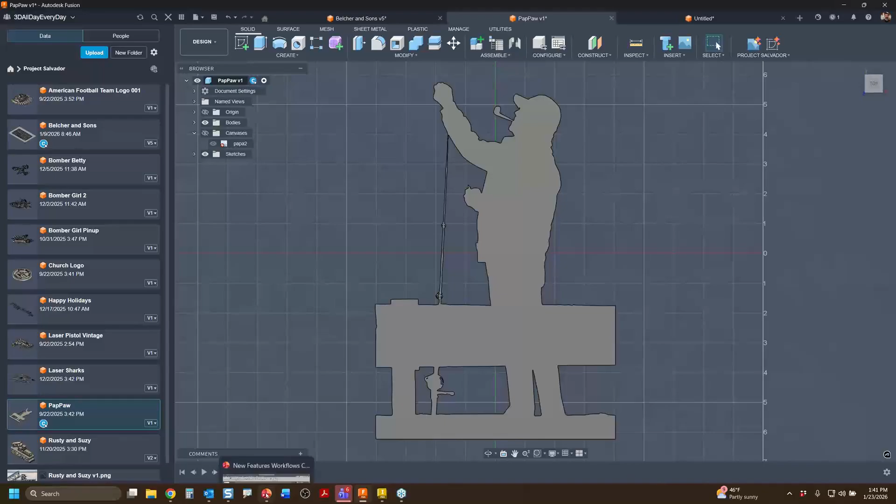All right, I need to get back over into my PowerPoint and jump back into it there. All right, so I want to start finishing up here.

All right, so how do you keep up with all of this new technology? How do you do it? I think about it—it changes every day. I have a few tips, so I'm going to share with you what I do.

I've got a few people I follow, and that can be following them on whatever platform you want to follow them. But take the second and click the bell to ensure that new content comes to you and you get that instant notification. Force yourself to do that.

I love YouTube, I'm on YouTube a lot. So when I find a YouTube video like that Project Salvador video, I immediately followed the person that generated that. But you should be, whether you use Fusion or not, I hope you're subscribed to the Fusion YouTube channel. You need to keep up with what's going on over there. You really do. You can't afford to fall too far behind because sometimes that gap is, you just fall so far behind, it's almost impossible to overcome.

But again, in YouTube, hit the bell. Look for your immediate updates and alerts. Subscribe. That gets you, the algorithm will start putting those videos up at the top. I can't tell you how many times I hop into YouTube to watch something fun, and then I end up spending 30, 40 minutes watching a new feature that's introduced in Fusion or Inventor or even AutoCAD. You've got to be proactive and set up your notifications so that they warn you when new stuff is generated by certain people or channels.